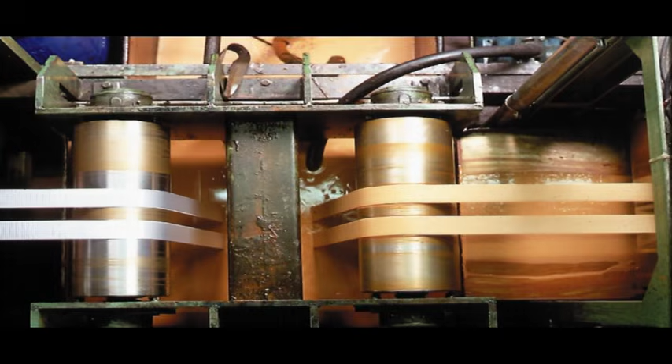Shackles and round slings combined with confidence. The Spanset Group has been intensely involved in the safety of lifting, working at height and load control for more than 40 years and has developed into a market-leading international company. Contributing to standards at a national and European level, a wide range of product developments and innovations, customer training, technical consultancy services and risk analyses have long since formed part of our everyday work.

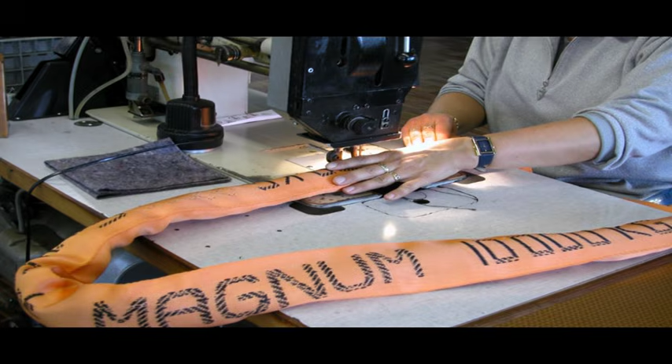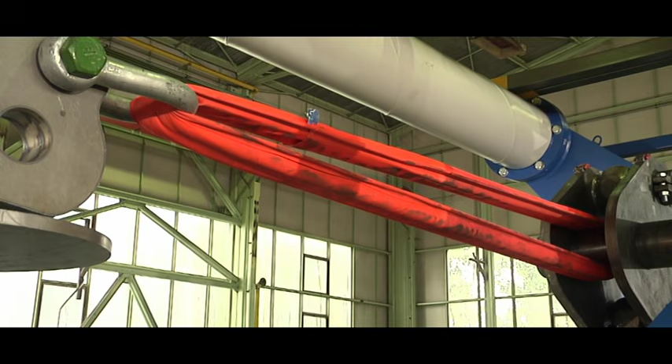At the suggestion of several industrial and key account customers, Spanset GmbH und Co. KG and Axzion GKS Stahl- und Maschinenbau GmbH, two companies within the Spanset Group, investigated the breaking strengths of round slings in combination with standard shackles. The background, results and reasons for these very important investigations are explained in the course of this film.

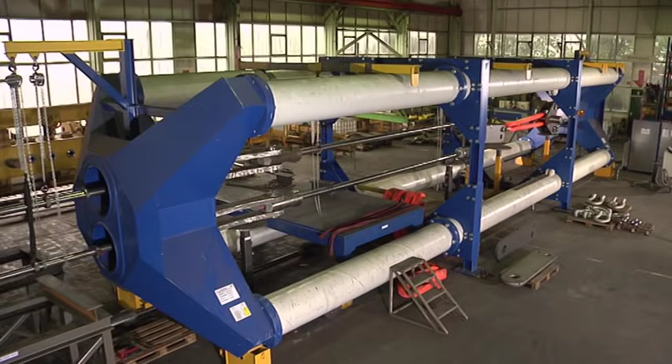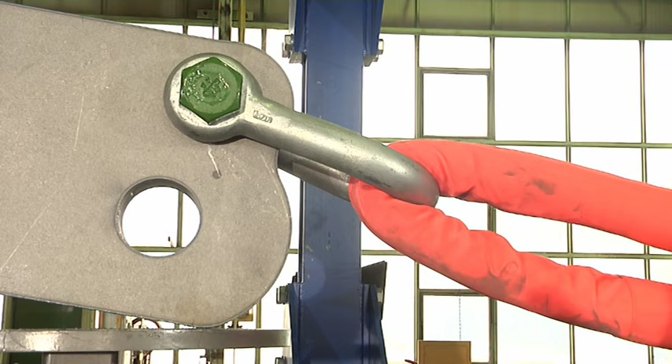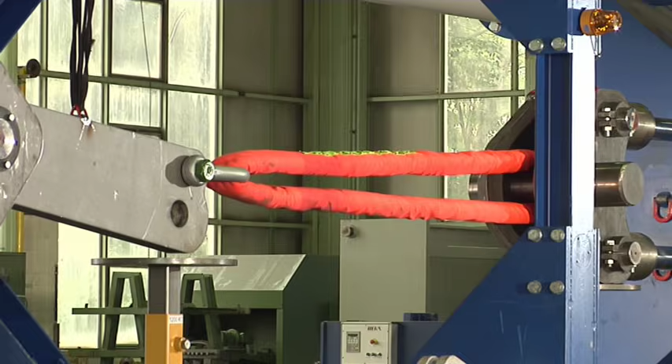One application of round slings frequently encountered in practice is their use in combination with shackles of the same load capacity. Shackles are used every day in industry and by tradesmen to extend round slings or to attach them to loads. When doing this, it is important to consider the bend radius of the round sling around the shackle body.

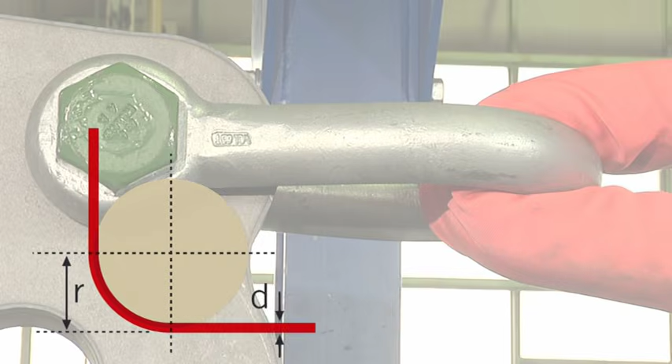As there are no standards or regulations for assessing these situations, manufacturers and users have to rely for guidance, in addition to the rated load capacities, on the rule of thumb definition of a sharp edge issued by the relevant occupational health and safety agency. This says the bend radius of the bearing surface of a sling must be no smaller than the thickness of the sling. However, this rule of thumb is not achieved in a large number of round slings and shackles of the same rated load capacity.

This rule of thumb for round slings, in use now for many years and derived from experience with wire ropes, involves a not inconsiderable degree of uncertainty, which represents a safety risk and liability for the user, as the rule of thumb does not correspond with the latest state of the technology. With the objective of eliminating this risk to safety, Spanset has invested a great deal of time and effort in determining the strengths of specific combinations of round slings and shackles.

A testing plan was devised in conjunction with the Occupational Health and Safety Agency, Metall Nord-Süd. The strength tests were then performed on 250-ton and 600-ton test beds at Spanset and at Axzion, the lifting beam manufacturer within the Spanset Germany group.

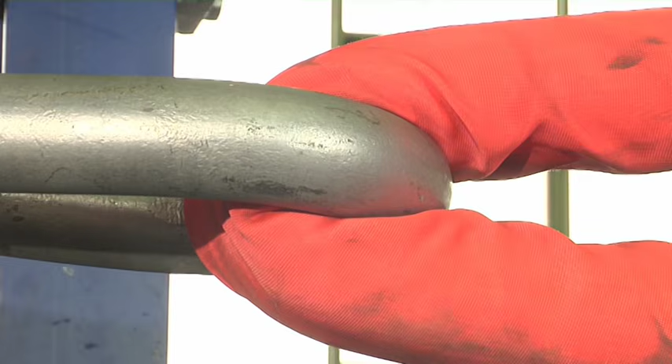For round sling shackle combinations with rated load capacities of less than 10 tons, the breaking strength was defined as 5 times the rated load capacity, and for rated load capacities greater than 10 tons, 4 times the rated load capacity. In the tests, the force was applied gradually and then maintained so that the force did not fluctuate sharply and a complete failure of the sling did not occur. In addition, variable load tests were performed in which the same parts of the slings were subjected to cyclic loading.

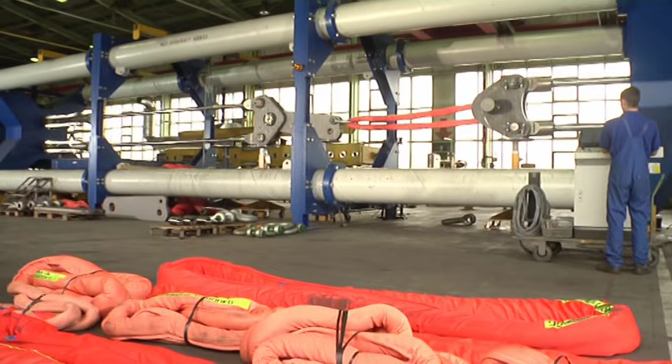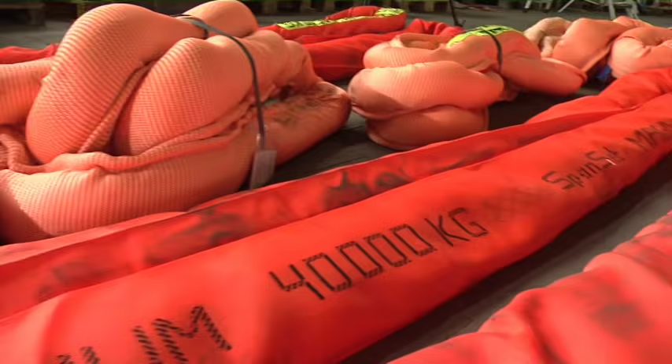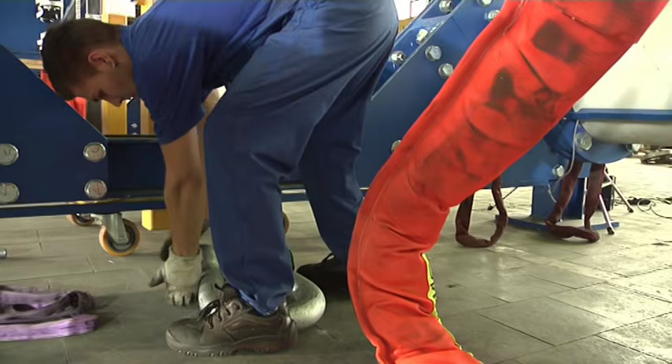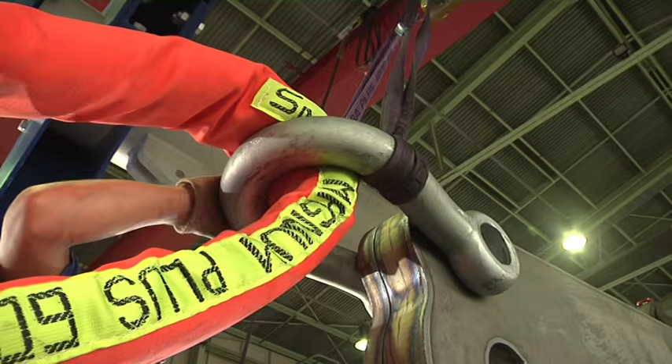The range of tested load capacities of the round sling shackle combinations covered the commonly available products with load capacities of between 0.5 tons and 150 tons. Traditional polyester fiber round slings were tested, as were high-strength fiber round slings, such as those in the Spanset Magnum X series. Standard shackles from Van Beest were used for the tests. These shackles are of a consistently high quality and have been deburred, which distinguishes them from imported standard shackles and makes them suitable for use with round slings.

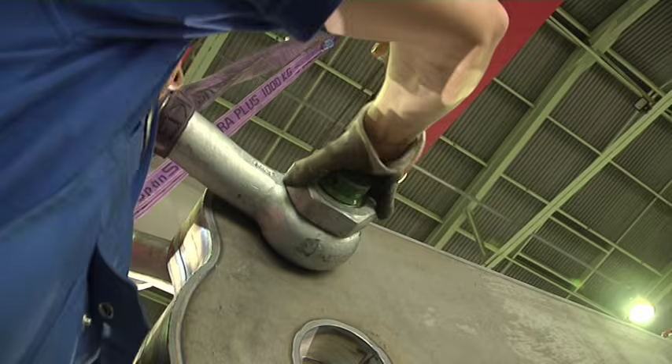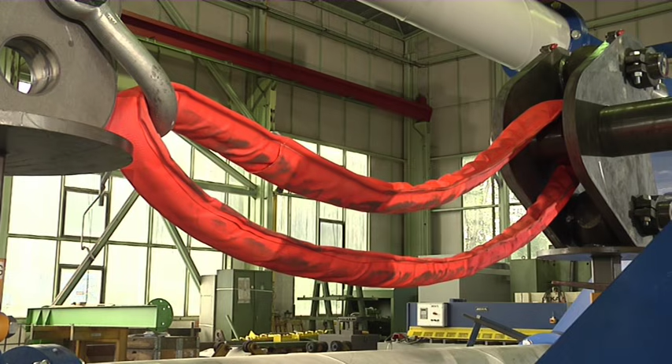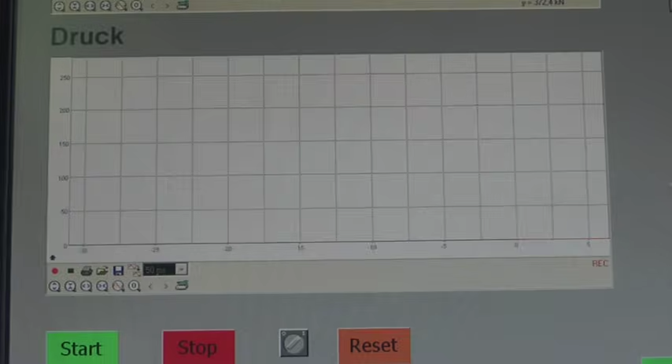To ensure that the highest stresses on the round slings always occurred at the bearing area on the shackle, the ends of the sling opposite the suspension points were passed over a pin with a substantially larger radius than that of the shackle. The applied test load was related in each case to the pressure in the hydraulic cylinder of the testing machine.

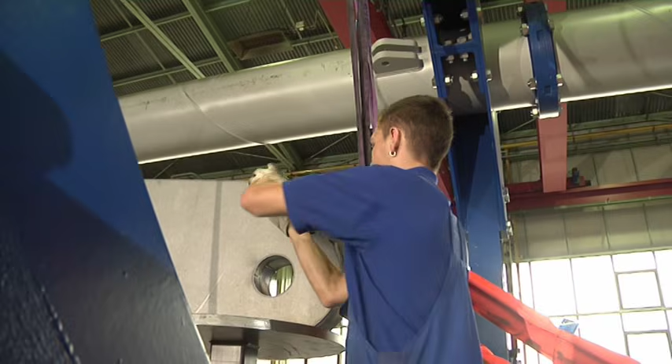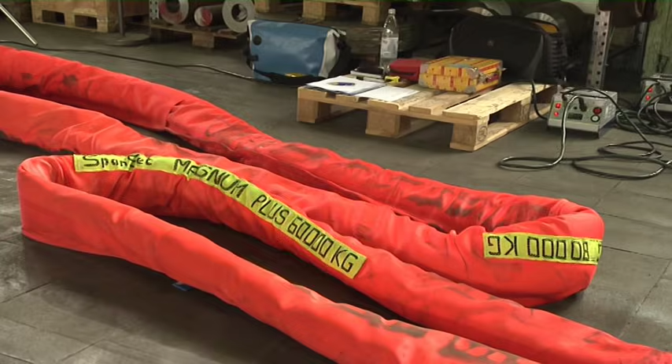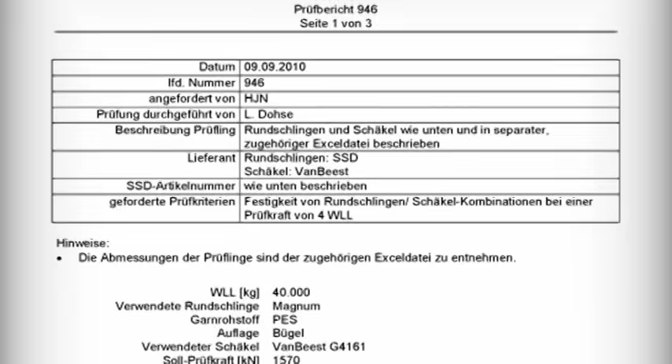After loading and removal from the machine, the test specimens were examined, and the findings recorded in a test report. In addition to the main criterion, i.e. whether the combinations of round slings and shackles had withstood the applied test force, it was also ascertained whether the individual components had been easy to separate from one another, and whether pressure points had led to any damage of the round slings due to contact pressure and shackle radius.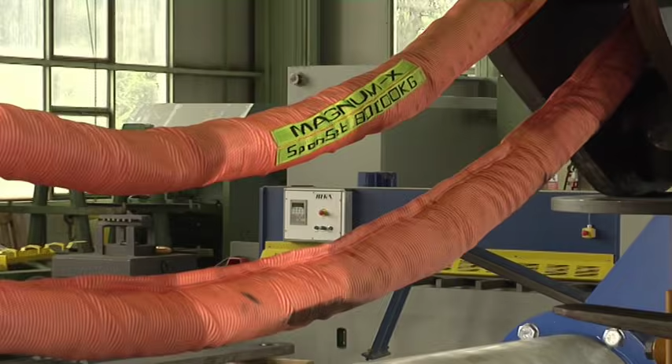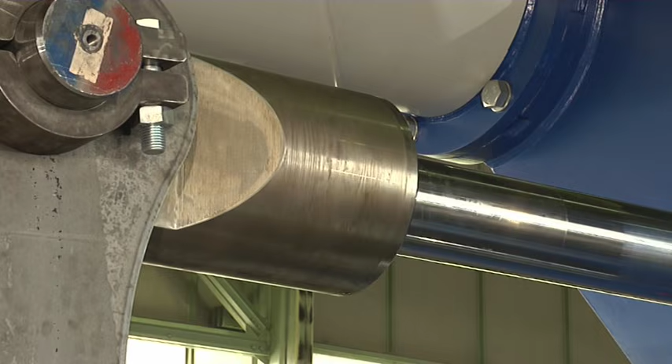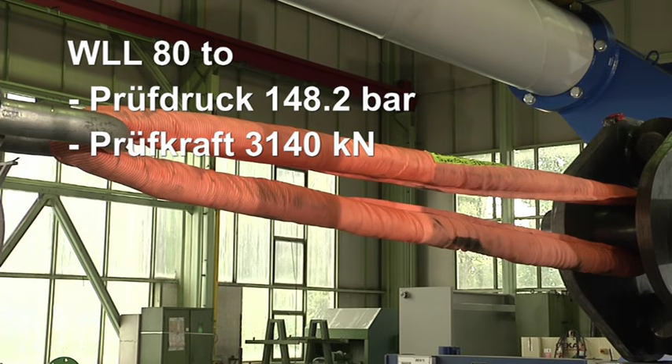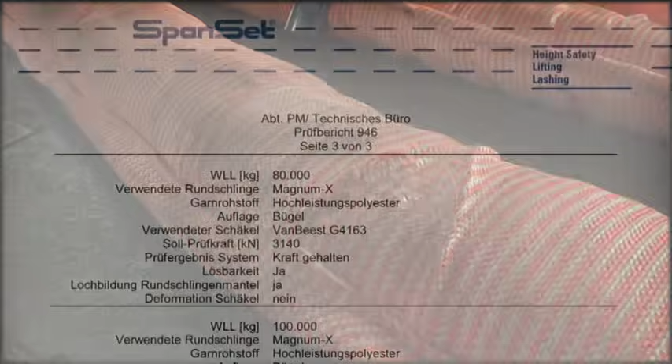Of particular interest was the testing of the new Spanset Magnum X round slings, as the fibers used in these slings have different properties to those of conventional polyester fibers. Examination of the pressure points of the sling sleeves showed that the slings had been loaded beyond their rated load capacities. The load-carrying core, however, remained undamaged. The known susceptibility of previous generations of high-performance fibers to this type of loading is no longer seen with the type of high-performance polyester used here.

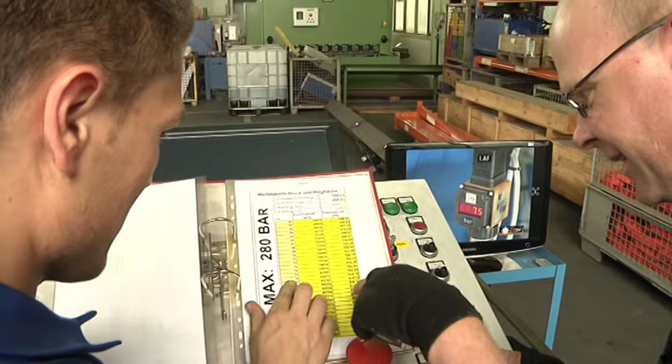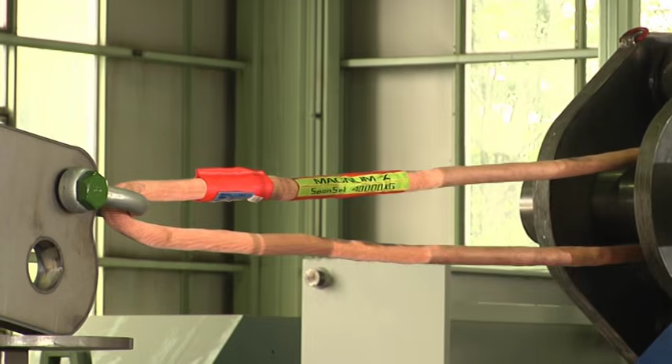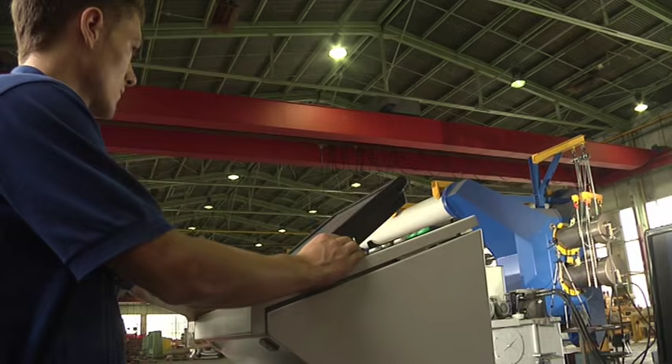The results of these tests and associated certificates provide proof that Spanset round slings, in combination with Van Beest shackles, achieve the required strengths and safety factors. This means that Spanset, working in conjunction with the Occupational Health and Safety Agency, has once more eliminated a risk to safety for users and customers. Don't take risks in the future. Use this knowledge in your routine operations and combine Spanset round slings with Van Beest shackles.